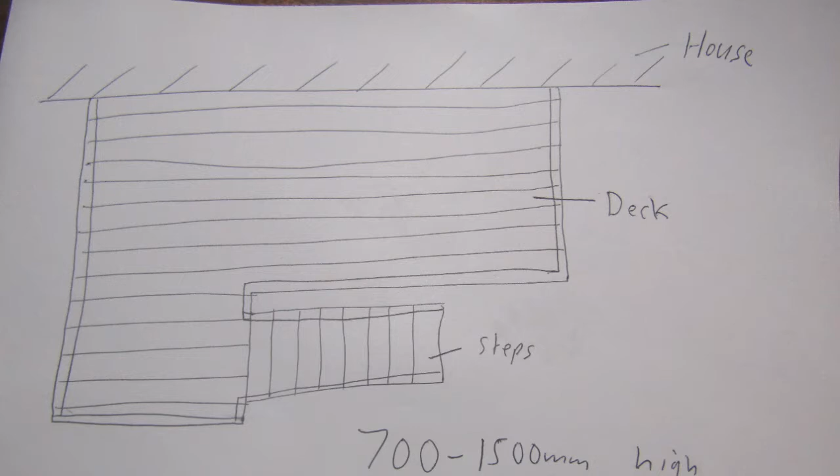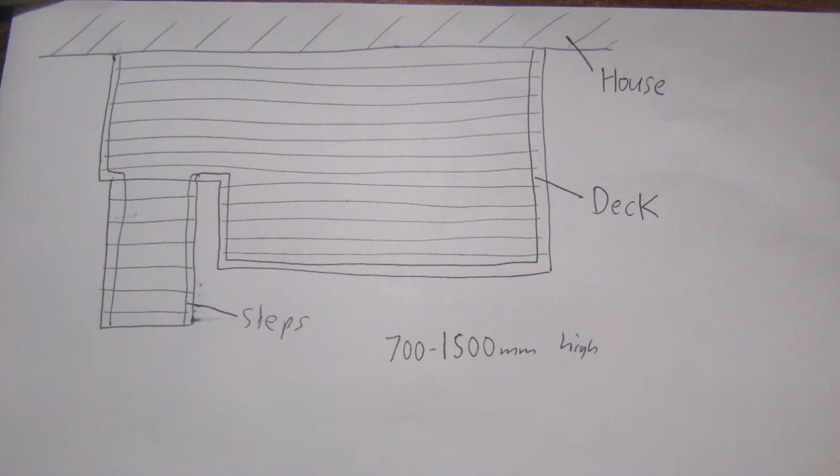Before I create any programming code, I need to create a 3D model of each differently shaped deck. The next step is to look at the building code for joist size, the ledger, the loaded dimension, and the angle of bracing. It's the 3.6m wide deck that concerns me most, because I'm not sure if it will fit the building code regulations, but we'll give it a go.

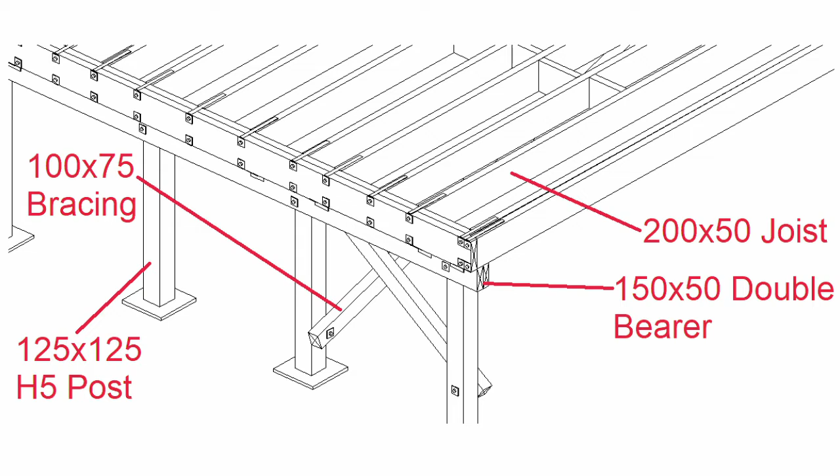With deck heights between 700 and 1500mm, I usually use 200 by 50mm joists, 150 by 50 double bearers, 400mm maximum spacing of the joists, and a maximum span of 1300mm of the bearers between posts, with 175mm overhangs at the end. I start by looking at the bearer table from NZS 3604 using these sizes.

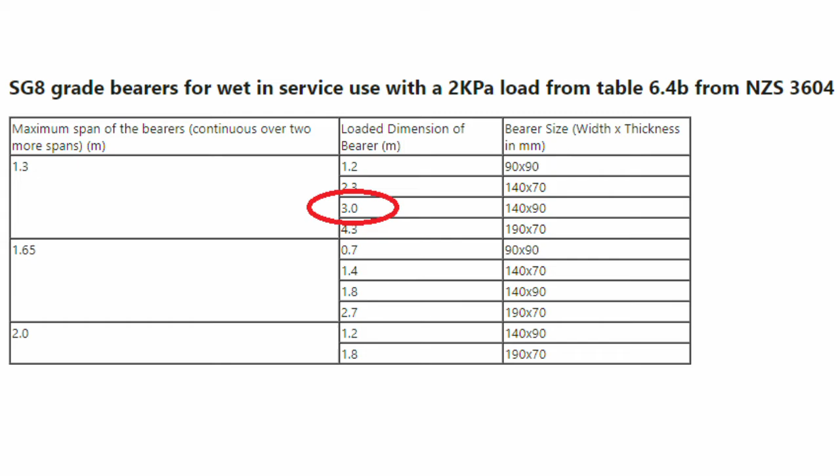This gives me a loaded dimension of 3000mm. With a deck being 3.6 metres wide, I need a span of 3425mm. So I look at the loaded dimension table, and the maximum span is 4575mm, so this arrangement is fine so far.

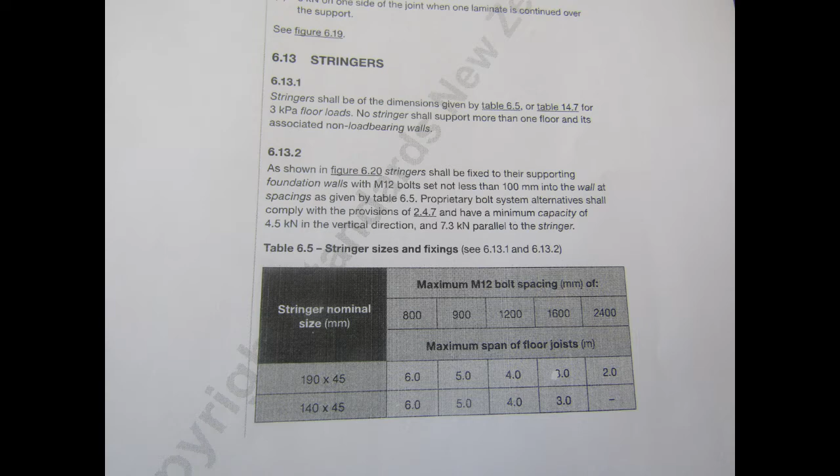I also look at the size of the ledger and what span this can support. Looking at NZS 3604, I find both size ledgers or stringers can support a 4000mm span, as long as the fasteners are not more than 1200mm apart. So this one's fine also.

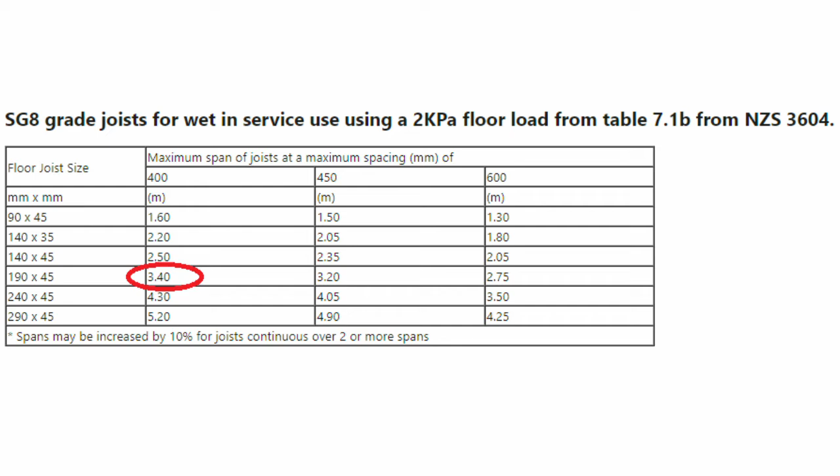With the joist sizing, we again look to NZS 3604, and here we strike a problem. The table states that for a joist size of 190mm, the maximum span is 3400mm, where I need a span of 3425mm. It's slightly out - I could use larger joists, but it's easier to make the maximum width of the deck 3.5 metres instead of 3.6 metres.

The other thing to check is the angle of the bracing, though this isn't a huge concern. For 700mm high decks I use anchor poles, and for 800mm upwards I use brace poles, but the angle of bracing must be between 6 and 45 degrees. For this design it works out to about 10 degrees. If it was a problem, anchor poles could be used for the 800mm high decks instead.

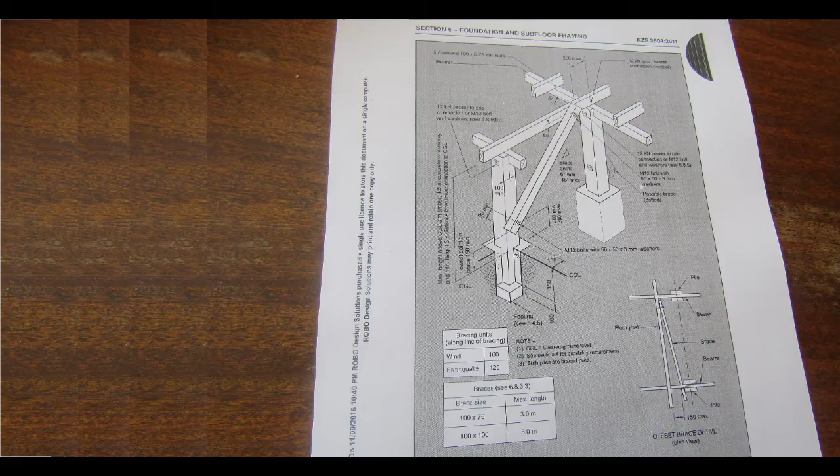With the maximum width sorted out, it's now time to look at the spacing of the joists. This is actually quite a fiddly process - there are stringers to avoid from the steps, handrail posts to avoid as well, and some joists have to line up with the bracing in the lateral direction. So the way I work this out is by spacing it all out on a CAD drawing and working out where all the joists are going to go.

First of all, I put in the location of where the bracing needs to go and line up the joists with that, and then from there I work out where the handrail posts go and fit all the joists in, making sure that they're not more than 400mm apart.

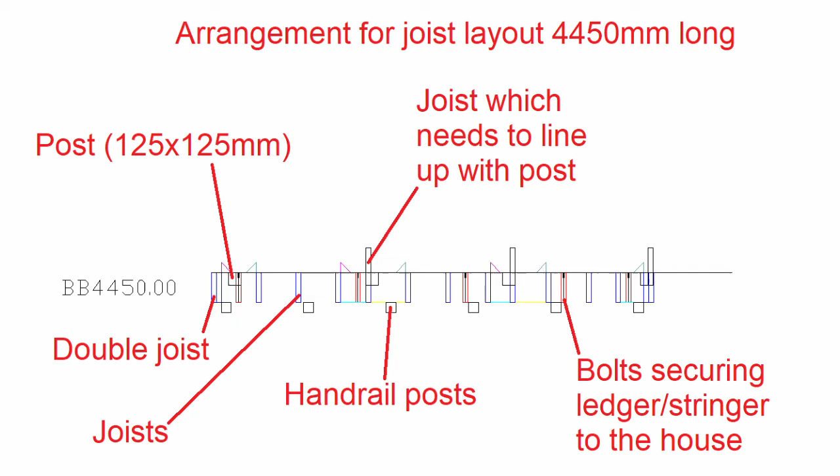Another thing I need to mention is that not all lengths are actually possible. Some of them have clashes with the handrail posts and joist locations which just can't move because they're attached to the bracing. So some lengths are just not possible.

It takes a while, but eventually I do end up with a 3D model of each of the different decks. Once the 3D designs are established, each of the designs is checked to see if anything is wrong and that they comply with all the building codes.

With every new design I seem to do, there's always a panic moment where everything just goes totally terrible, and the one that's happened today is I've got the joists and the bearer tables mixed up, thinking that all my decks are completely wrong when they're not. It's a real panic time, but it only lasts about 5 minutes and I realise my mistake.

I've just had a look at the designs again, and there's something else I think I could improve considerably. I'm moving the whole bearer back towards the house by 15mm, so the ends of the joists have got something to rest on without any support from the fasteners. But the problem is that all the designs have been done so the largest decks are 3.5 metres wide, so I could have probably made it 3.6, but things are so far down the modelling track that I'm not going to change it. It's easier for me to keep it as it is, but it's still within the building codes anyway.

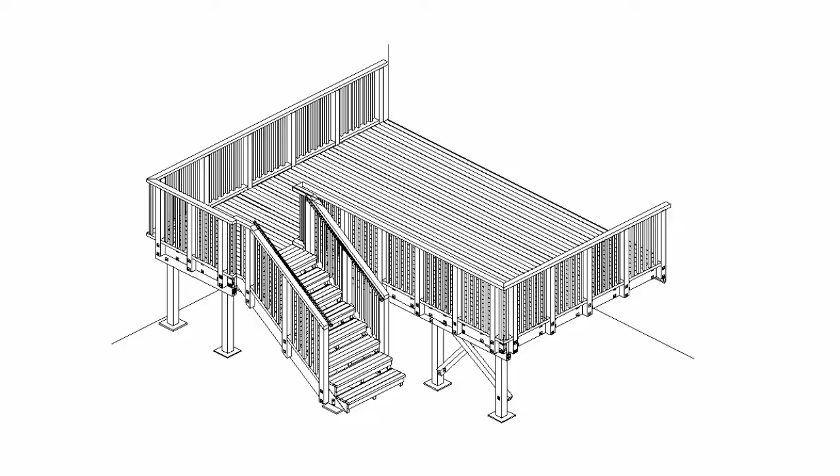Okay, so now it's time to check some of the 3D designs, and it's not good news. There's mistakes all over the place. I can't believe the number of mistakes I've actually made, but things will get sorted out.

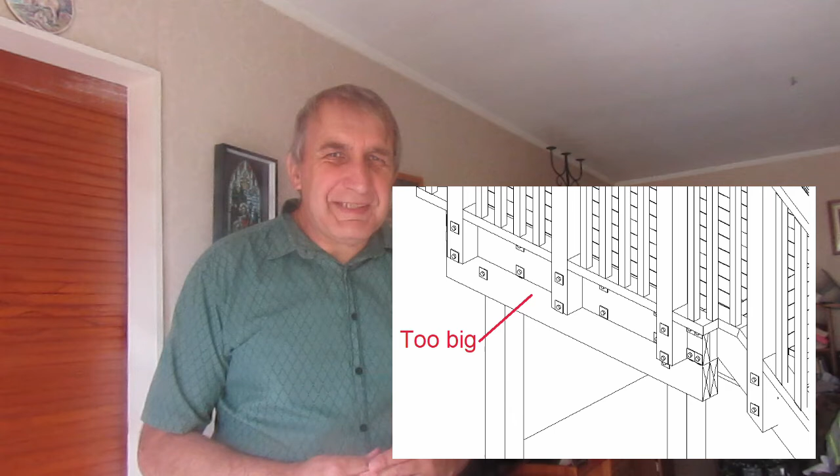There's bearers in the wrong place, there's problems with the bracing being too far down towards the ground on some of the decks. One of the decks actually had the wrong size bearer for the short little bearer by the top of the steps, but things will get sorted out. Unfortunately it's just part of the design process that when you create something, things don't always go right, so things will get sorted out anyway.

Also, creating the blocking along the wall is a very fiddly process, and that quite often takes quite a few goes just getting that right, making sure that the blocking actually lines up all the joists, but it's getting there.

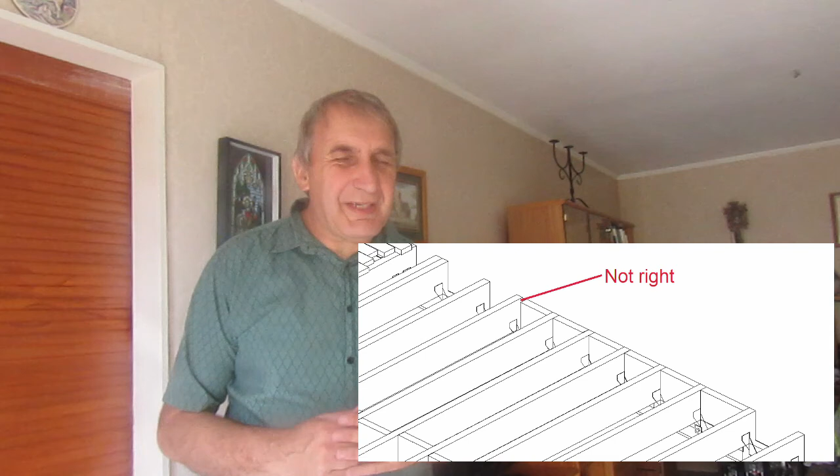Okay, so now it's the 21st of January. My prediction on the 15th of December for how long it would take to create this new deck was about 4 weeks, and my prediction was way out. It's taken quite a bit more effort than expected.

Half the battle is actually getting the 3D designs right before I start doing any coding, and it's running behind in my YouTube schedule, so I'll split this video into 2 videos and cover the coding in the second part.

But now I'm happy with the 3D designs. There's one small slight problem I've got to sort out, but it's a lot better than what it was in the past.